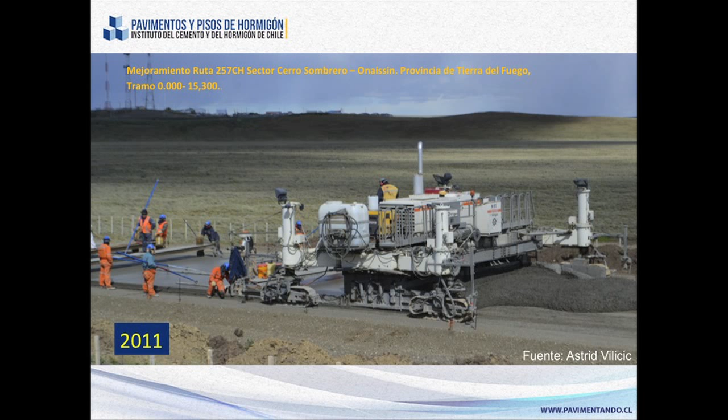For timing purposes, I would like for us to start this presentation with a project that is quite important for me because fortunately I have had the opportunity to see paving works from Mexico to Patagonia. One of the companies that has given me a very good impression regarding their way of working and performance is Vilicic, because in several aspects, they are a role model in terms of work execution. Here we have the author of this paving work, and since it is in Chile, I consider it ours, so I'm very pleased to present it.

I would like to thank them for this because many of the things I can tell you, she keeps me updated with all the information. I would like to highlight some interesting details of this work regarding performance and the works in general.

This was quite an important milestone because it was the first work that combined optimization of thicknesses through optimized geometry, meaning short slabs, with the incorporation of synthetic fiber. Several milestones took place that set the starting point for a new generation of concrete pavement here in Chile. There have been several generations of concrete pavement, but I'm referring to the last historical moment where there have been many modifications in the specifications and in the way of building. Some technologies have been incorporated that seemed impossible some years ago, and some of them even reflect what the entire world is looking at here in Chile.

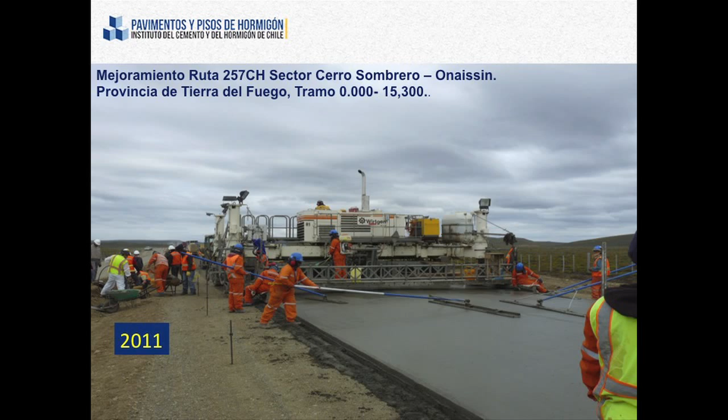Those works had some interesting highlights as well. But now I will let you know about some milestones.

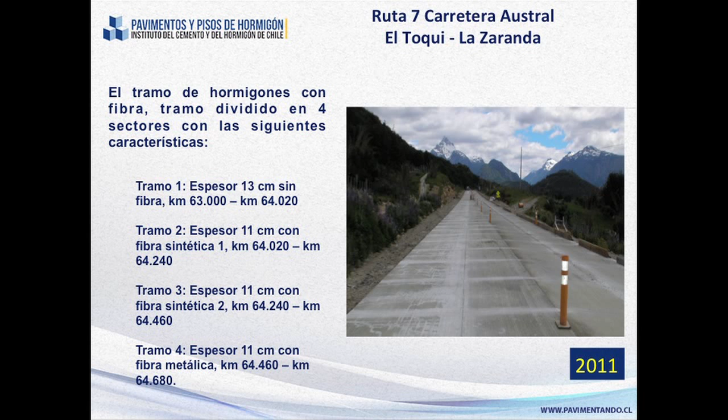For instance, in Route 7 in the region of Aysén, you will find the project El Toqui La Zaranda that was carried out in 2011 under the initiative of Cesar, who was the manager for this section, which was quite interesting in the region of Aysén, where we had the opportunity to check the behavior of different types of fibers and the effect they could have in terms of optimization.

This project, according to the words of Cesar, has currently been in operation for 4.5 years, with optimal performance in general terms. For those of you who know the region, Route 7 is the main road of the region without having very high traffic, and this section, despite being a test section, is a road for definite use.

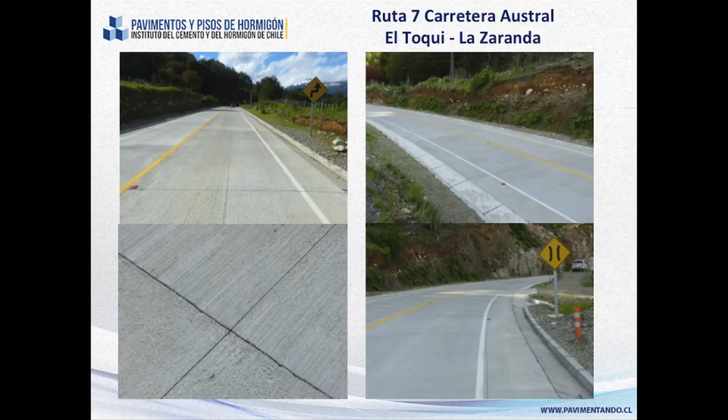Here we gathered a lot of knowledge and information, and this project even has a weather station whose purpose is to enrich entry data for future projects being designed with this methodology. These are some pictures from the last time I visited that section some years ago, and it is in optimal condition.

Another interesting project for us, which was a milestone back then, is the replacement of Route M50 Cauquenes-Chanco. This 15-kilometer project in short slab, in the 7th region, was also a milestone from the point of view of several execution aspects in terms of road works for concrete pavement in Chile.

One of the most important details is that a high percentage of the work was carried out as night pavement, which was practically new for those of us used to those types of works in Chile. It addressed a problem that was substantially dangerous in the execution of this project, given its geographical location, because in that zone in particular, thermal gradients could reach a condition of severe construction curling that could worsen the future performance of the pavement.

So we tried to go to the source of the problem, and we used night pavement to reduce that risk.

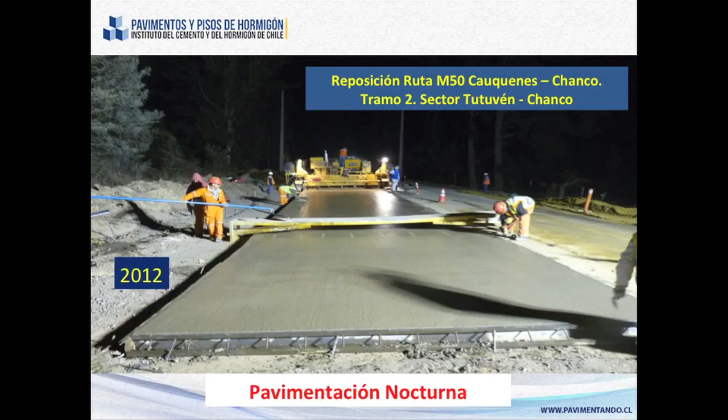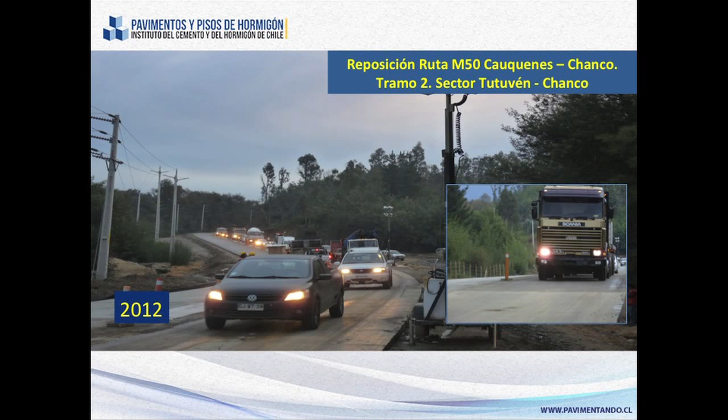Here are some details. I already talked about night pavement. Another important detail to mention has to do with what Robert said regarding the implementation of maturity in Chile to enable the opening to traffic in the projects hired by MOP.

Currently, this is a benefit because one of the aspects where concrete pavement is vulnerable is the feeling that you have to wait a long time until you open it to traffic, with the possibility of not only measuring maturity, but also processes that make concrete more mature and allow opening to traffic.

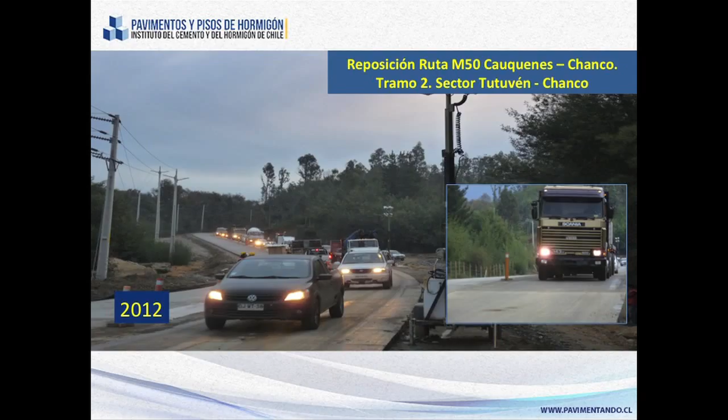The benefit that it implies is what happened in this project, for instance. According to what the supervisor reported, we're talking an average of about 4 or 5 days until the opening to traffic under normal conditions. And I'm talking not only of lightweight traffic, the entire route under normal circumstances. You see that we have those typical Scania trucks already driving through the road after the third or fourth day of executing the works. That is an important milestone in terms of what a contractor needs today, which is to speed up processes.

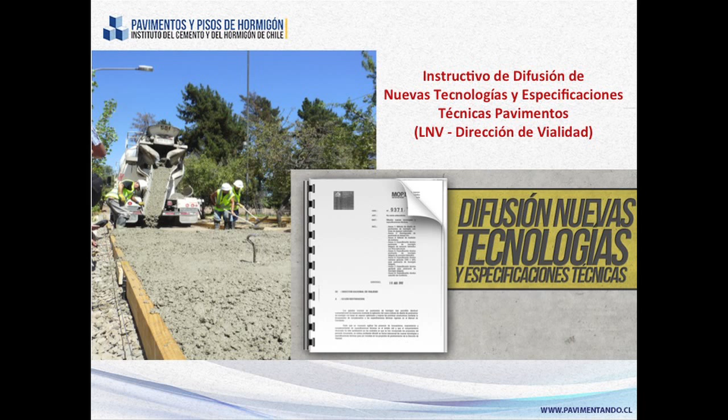This makes this possible, and they also imply a scale economy. All these projects at the beginning were possible thanks to modifications in their specific specifications, and as a bank of information was being built that allowed us to have the tools to do this in the best way possible, comes the instruction on new technologies, on technical specifications for pavement.

This was the work of the road laboratory. I have Marcela here, and we have worked very well together. We have Cesar also. I already named you, so it's important for you to keep this in mind.

These guidelines, despite the fact that it is a document that was published in 2012, we have looked at all the mechanisms to distribute it. I always run into the fact that there are people that do not know about its existence, but it is very important because some of the technologies still are not part of the road manual.

This document enables them to be used in Chile. Thanks to this documentation, and we will have to update it at some point to the new experiences that we have had over time after 2012, it is a document that you can access through us through pavimentando.cl, where you can download this document, or by contacting us, and obviously with the National Road Laboratory. It's important for you to read this document because it enables many of the technologies that can be used currently.

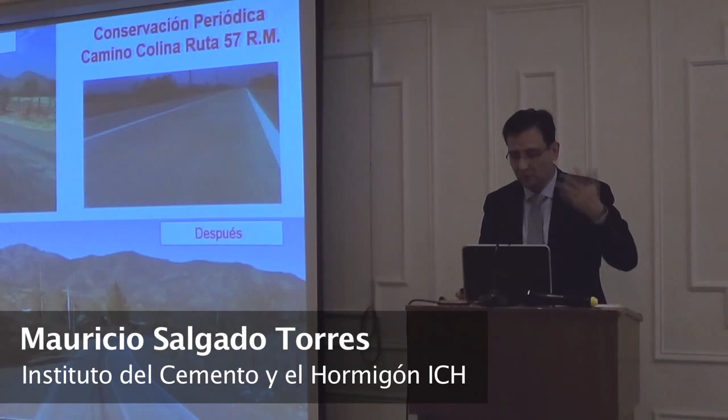And this is how we looked at the possibility of incorporating a short slab concrete in this access. You can actually visit it, and we inspected several times because this is the closest one that we have to Santiago in terms of short slabs.

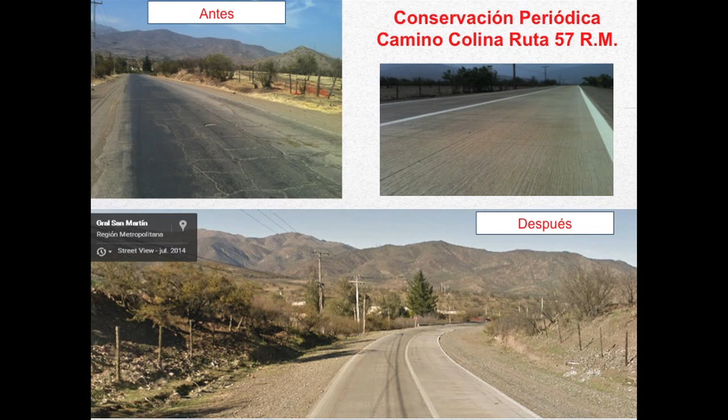Once again, these are images of Google Maps Street View to show you a representative picture of that pavement, how it used to be in 2012, when we visited for the first time and we made the decision to intervene it, and how it looks now in July 2014, according to Google.

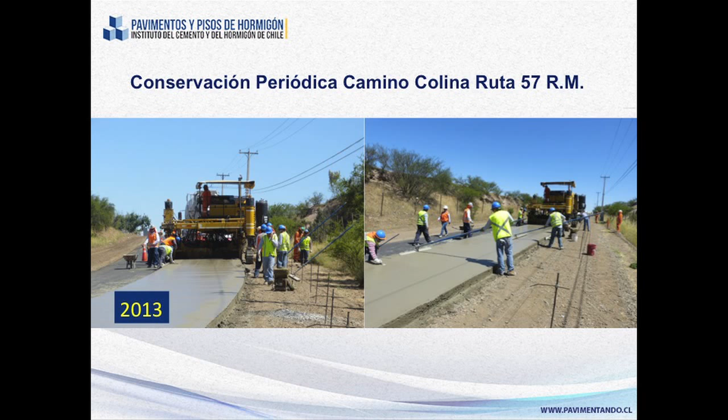In the summer of 2013, we did the execution of the construction. Here are some pictures of January 2013. And here, the pictures that Google took were during the construction process, which was in November 2012, where we started the works, and it ended in January. In April 2013, it was already in service.

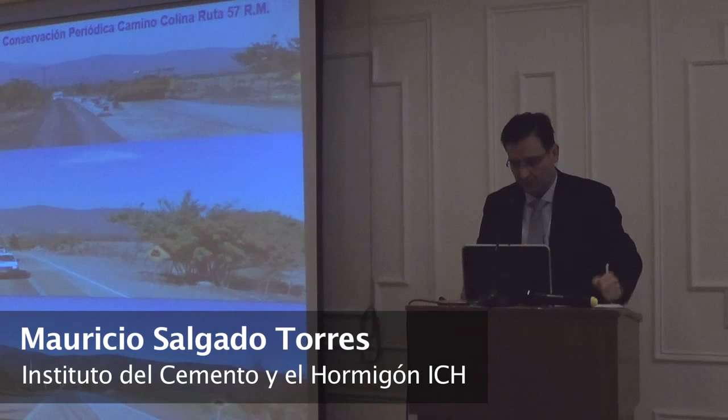Afterwards, there have been several updates where you can see the current conditions of that pavement. Some contracts have been signed: 15 kilometers, one 28 kilometers, and the other in Chiloé.

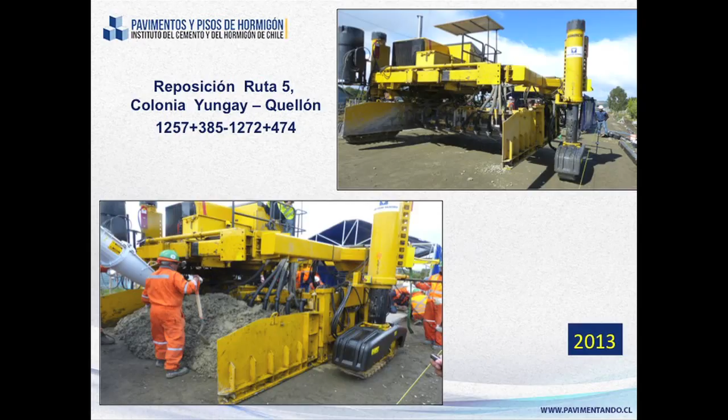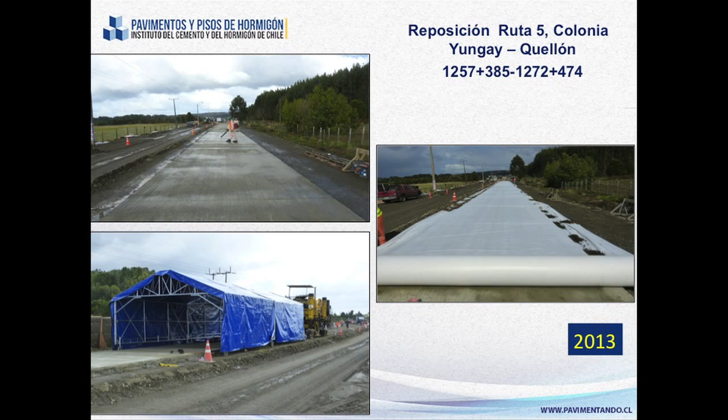These are pictures of Route 5 of the section Colonia Yungay Quellón that is already finished, and these are pictures of the execution phase where some incorporations of aspects were done in terms of the wet layer to help the curing and maturity process for the concrete blanket to open to traffic quickly, or some other measures due to the weather of Chiloé that is very changing.

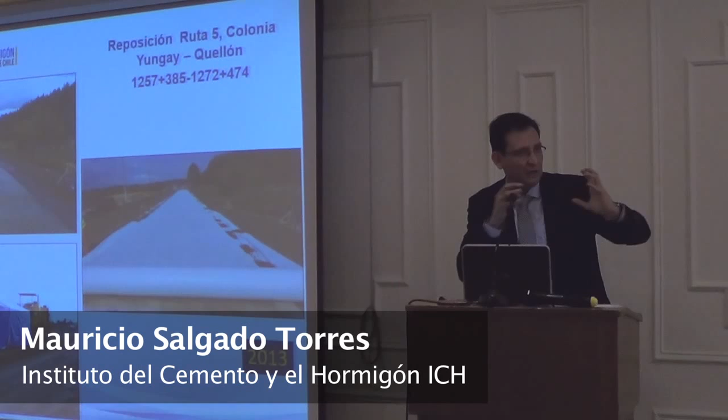Sometimes I have a sunny day with very good conditions for paving, and then in 15 minutes I have heavy rain. So we had to make some preventions in terms of rain and wind, which are very characteristic of Chiloé. The tenting section is longer, but here in the picture I'm showing you the first part of it.

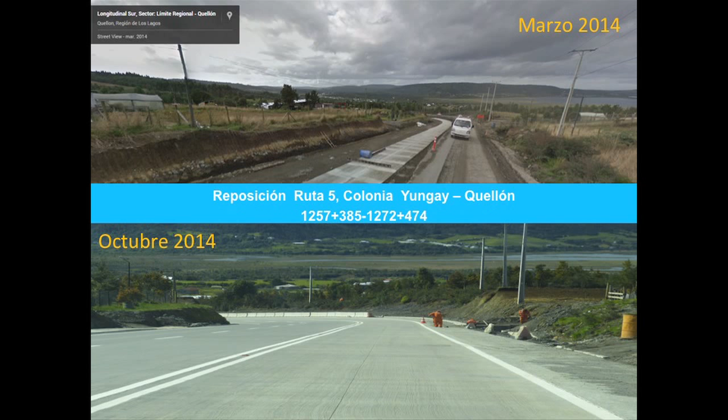This picture shows a very interesting detail. Up to the transversal section of the Colonia Yungay section, obviously it is an asphalt pavement. You can realize which was the section and the plotting that it had. And this is my picture, almost the same place, and you can notice the difference in it.

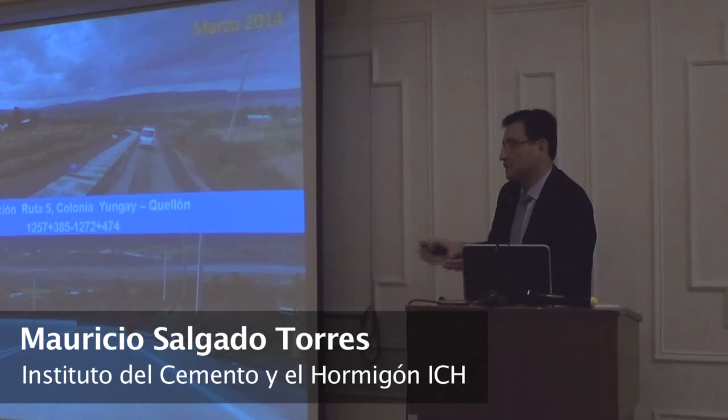I'm showing you this because with these kinds of pavements, it's not just an opportunity for improvement, but it also gives you economy of resources, where with the same amount of money you get a better section and an improvement of the road. This is what we achieved by incorporating optimized pavements as a general project. With other conditions and structures, it would have been impossible to reach that level of improvement. We now have interesting cross sections on the island that didn't exist before, and they reduce travel distances from Puerto Montt to Quellón. I could tell you many stories of how long it used to take me to get to Quellón compared to now, with the route practically finished.

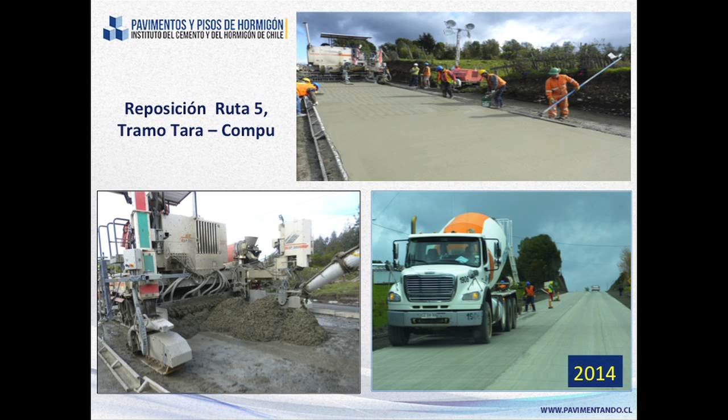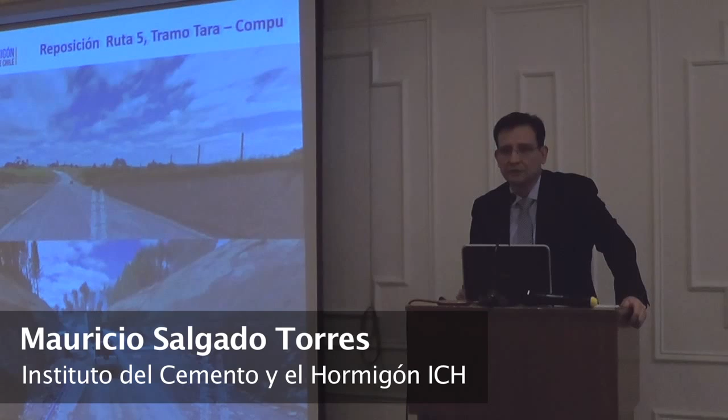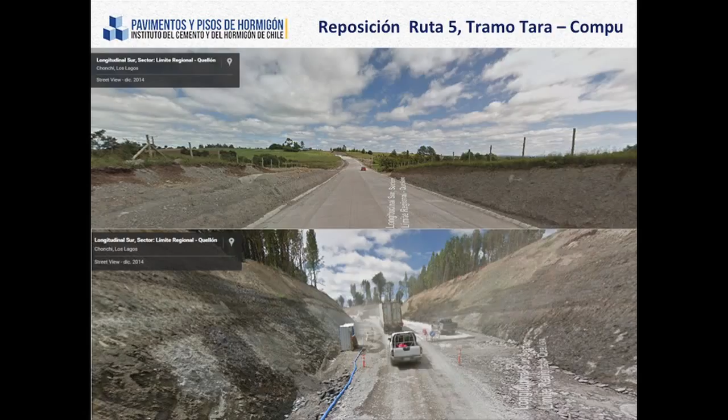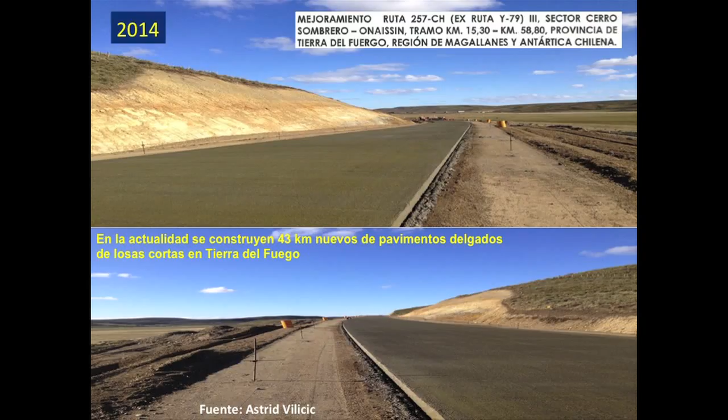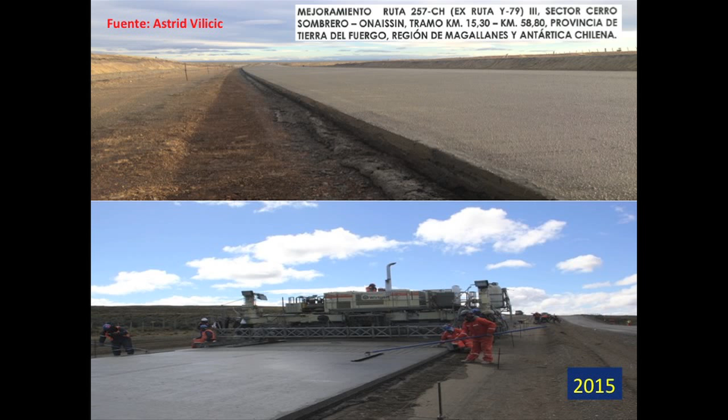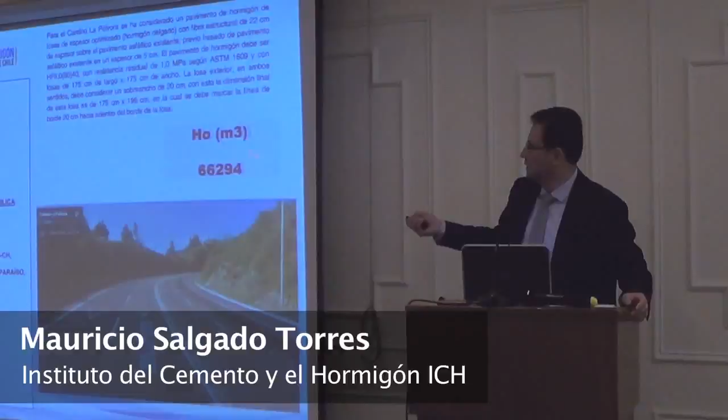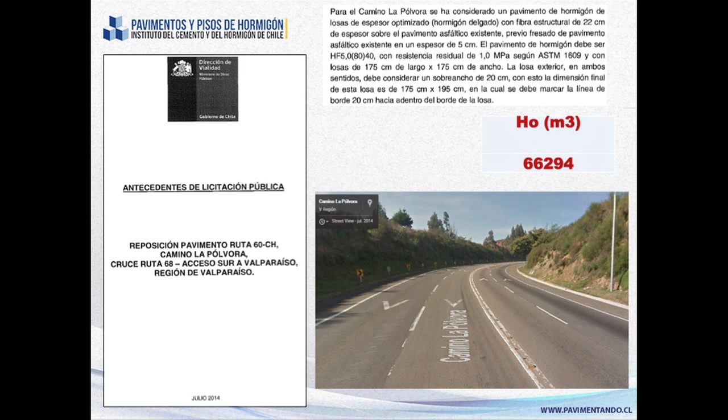This is a project that's about to begin. Here I'm accompanied by the person who will execute it, and I hope to have a lot of images for our coming presentations. He will be in charge of the La Pólvora project, which is fantastic because it's a great challenge in terms of geometry. We haven't done this before, but we know he'll be able to do it. We'll create an important structure with short slabs, located over the old asphalt pavement, so this will be a non-adhered overlay. To give you a sense of the order of magnitude involved, sometimes the kilometers can be misleading. It's about 15 kilometers long, similar to Yungay, but that's just a simple section. This is a double pavement, so we're talking about 66,000 cubic meters of concrete to be placed — an interesting figure. It will begin in the second semester of this year.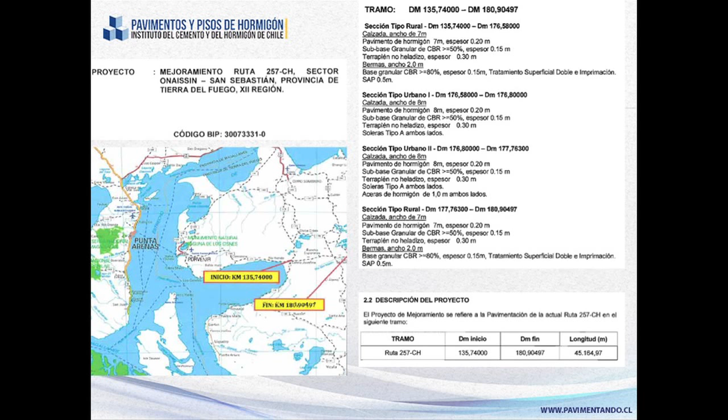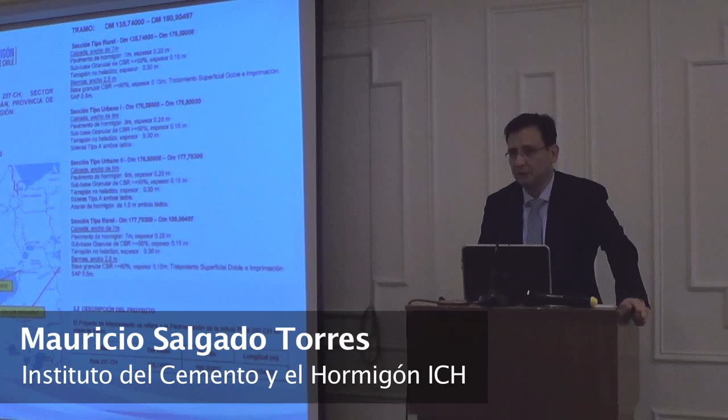There's another project underway that's just been awarded: the section of Highway 257. We're talking about 45 kilometers in length that will start construction in the coming months. There's also a project in the tendering phase, the Castro bypass, involving around 22,899 cubic meters of concrete, valued at 25 million pesos. This is also a short slabs project, changing the focus and moving from projects for high-transit short slabs.

There is a second possibility derived from the short slabs we've been pushing recently, which will be interesting not just for Chile but for other Latin American countries: what we call ultra-thin pavements of fiber concrete. This is for low transit roads, unlike the Pólvora route and others with significant traffic. We're talking about an application that until recently seemed impossible for low transit roads — people familiar with this would say concrete is impossible to use here. But due to technological changes in recent years, we can reduce costs and make it possible to implement these solutions at the level of basic or intermediate basic roads. This gives us a cost-effective, competitive alternative with a more prolonged life cycle, which makes it highly attractive. We're thinking about how to bring this solution closer, which we know has already been implemented and put up for bidding by the ministry.

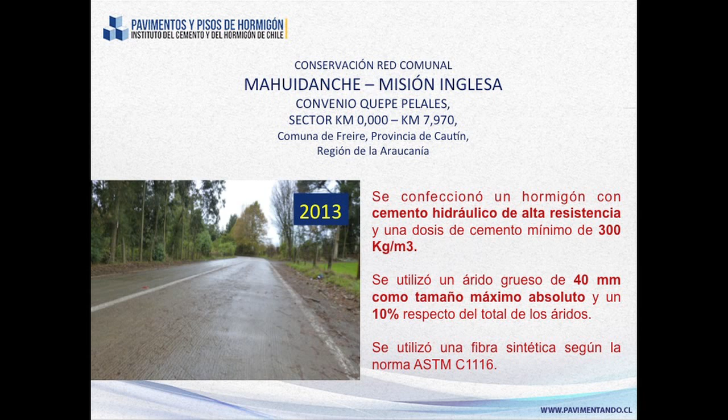So these are projects that have a certain profile, where we could at least open up possibilities and implement solutions of this type. What's most outstanding in terms of time in service is Mahuidanche and Misión Inglesa in the 9th region, which ended in 2012. It's been in service for more than 3 years.

These are photos that I took every time I go to Temuco. I go to Mahuidanche and take these pictures, which basically show what we have as a structure. I took these pictures 2 weeks ago when I went to a seminar in Temuco and visited the section, and obviously it's impeccable.

Thinking that these are concrete structures with 8 centimeters, 9 centimeters in the center and 11 at the edges, supported over the platform that existed before. There was no incorporation of any base, but we took advantage of the good support capacity that the existing pavement had for a road that was already being used for vehicular traffic for a long time. If it hadn't been intervened with this ultra thin pavement, probably a double treatment solution would have been incorporated, which does need a base and the double treatment to have a competent structure.

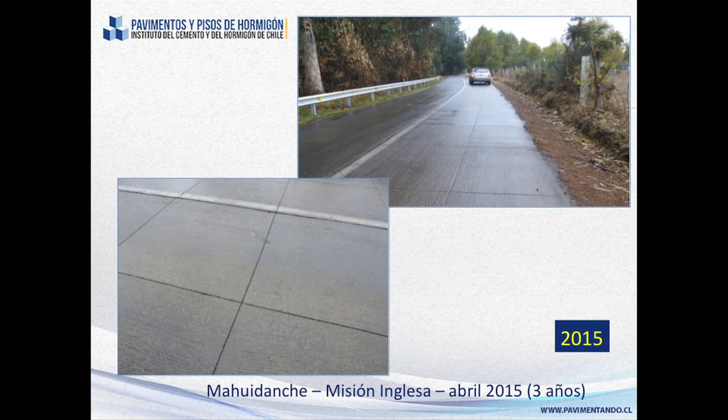In this case, what's interesting is that this solution is already 3 years in service and it will be lasting for a few more years. It depends on the location, the climate conditions, traffic, and in some cases it could have very extended durations. I've seen some that have lasted many years, and I've also seen double treatments that in more critical situations, probably in 6, 8 months or 1 year, need to be renovated.

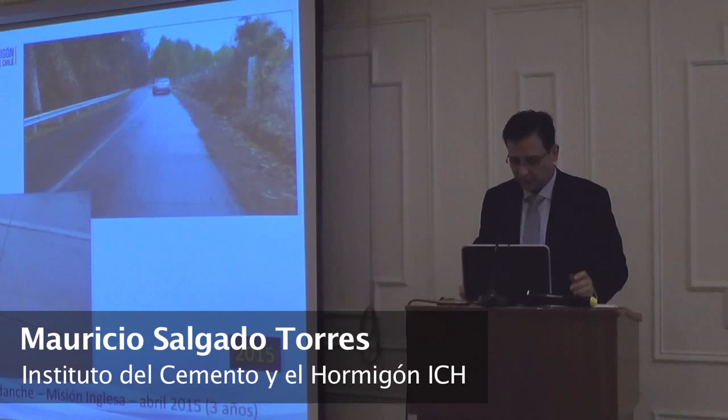And this is precisely where this alternative becomes interesting, because if the two are comparable in cost and one can give me a longer term solution, that's where this solution would fit perfectly. I'm not saying it will fit all projects, but we do have a new window open with different possibilities for new pavements in the country.

Another section relatively close by is this initiative that we achieved thanks to the regional government, the Highway Administration of Valparaiso. I'd like to point out that here's a person from the regional administration who can tell us more, and I want to thank them because they gave us all the facilities to construct this section with characteristics very similar to what we've been discussing today, so that we could apply the ultra thin pavement and so that they could see that it's possible.

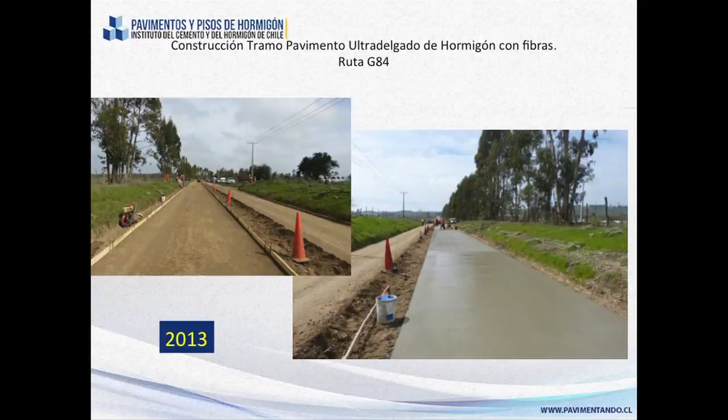They were talking about the section with low transit and didn't believe us too much, but since they've seen the pavements already in service, they've changed their perspective.

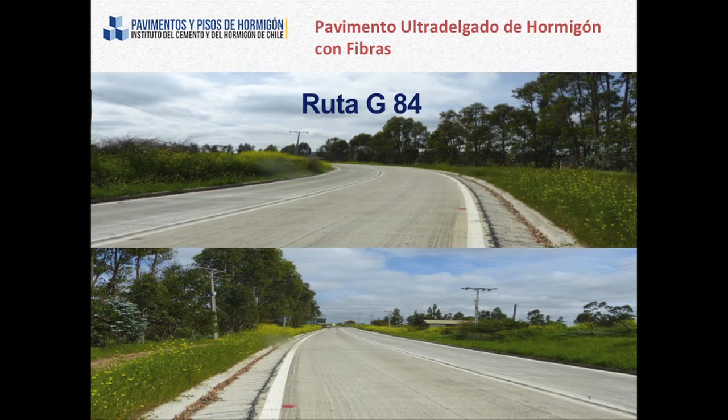In October 2014, this was how it looked, quite good. Other photos. In fact, I always comment how content the roadway would have been because the sun came out and the flowers came out.

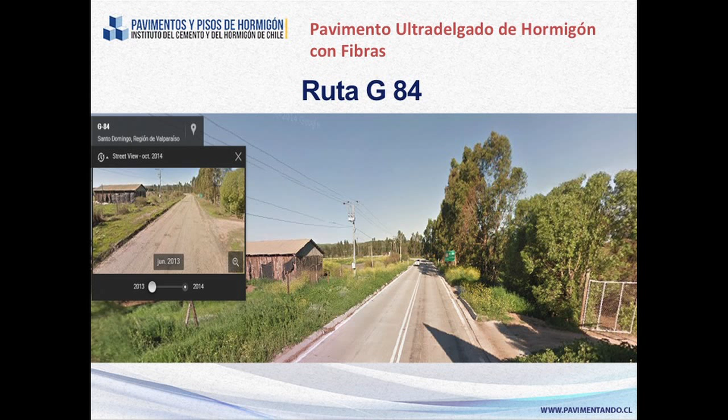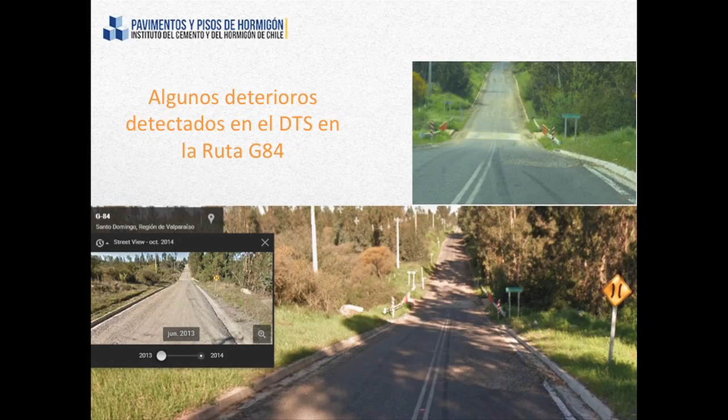For those who don't believe me that I take pictures in special situations, I also invite them to visit Google Maps and look at how the pavement looked before. It's an alternative you can see. That's what the transversal section looked like with gravel, and now with concrete. Here's another view, with the short, ultra thin slabs, and also the nearby slabs.

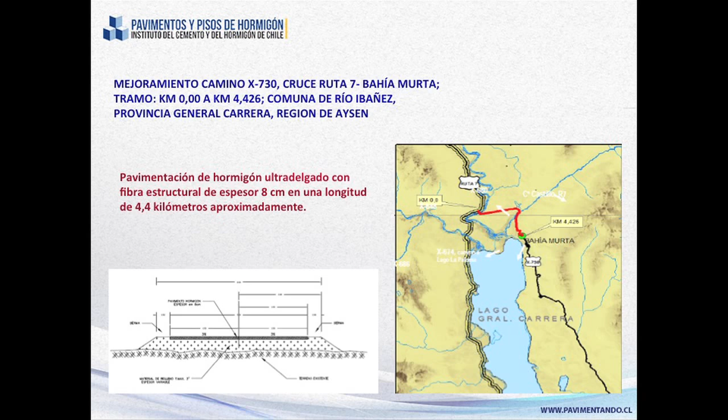Now we'll wait for some details on the dosages. It would be very interesting. This is Bahía Murta, a longer section of 4 kilometers, and at one point we will show you what's happening with this project.

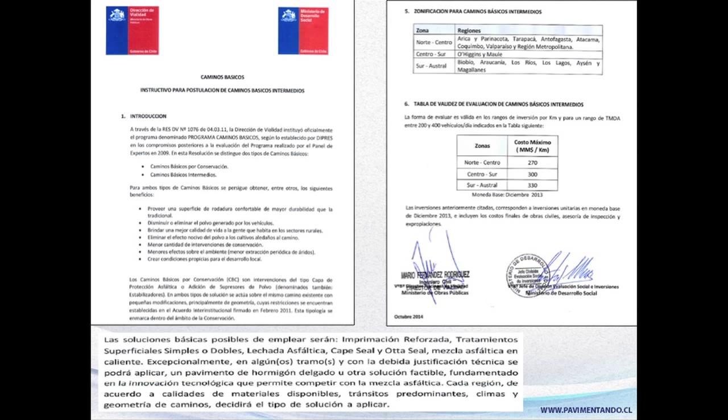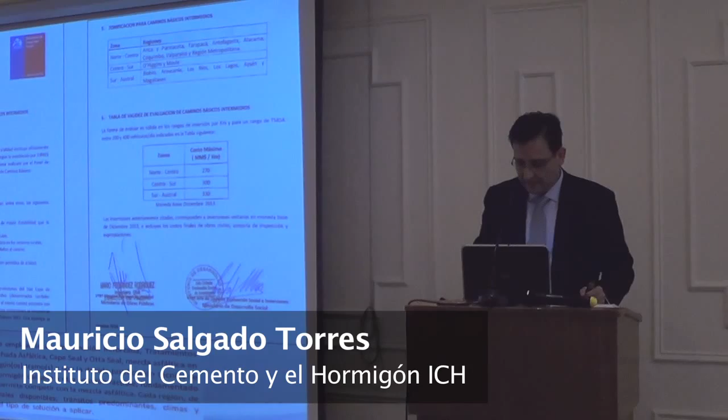Meantime, there have been some interesting administrative developments. These are the instructions for submitting a tender for basic intermediate roads. This was done last year in 2014, and in it they incorporated the possibility, in the instructions, that thin concretes could be considered as an alternative. Even if it seems quite subtle, it makes a big difference, because it practically gives huge backing to the solution, that it can technically be used, today by the Ministry of Social Development and of Public Works. So this can be decisive for us.

And based on the success of the incorporation of this technology, the Ministry of Public Works also became interested, making it possible for them to receive preliminary designs when they're surveying the initiatives.

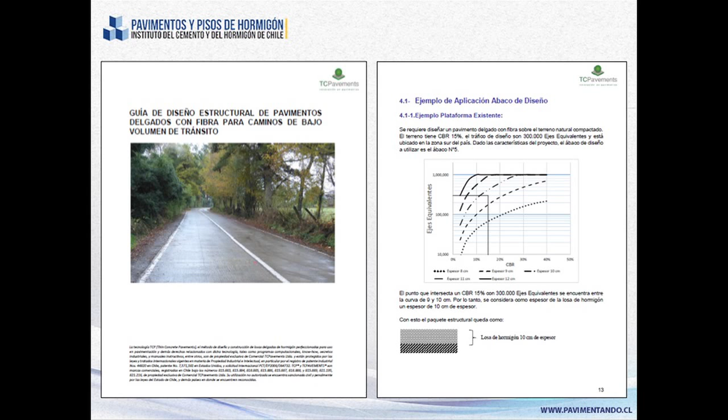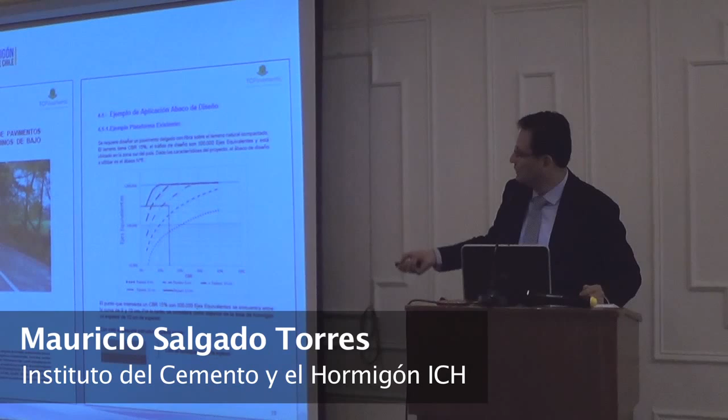This is a work that's in the development of a guide for structural design of thin concrete for low transit roads. This alternative allows us to quickly design, with very simple inputs, what the characteristics of the pavement needed would be for a low transit project.

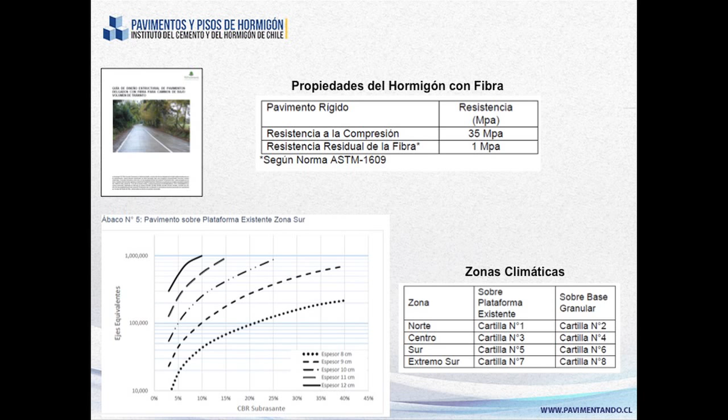The guide is very simple. It's got different graphs, and it talks about the existing terrain characteristics, and whether a new base would have to be put in. And here we use OptiPave.

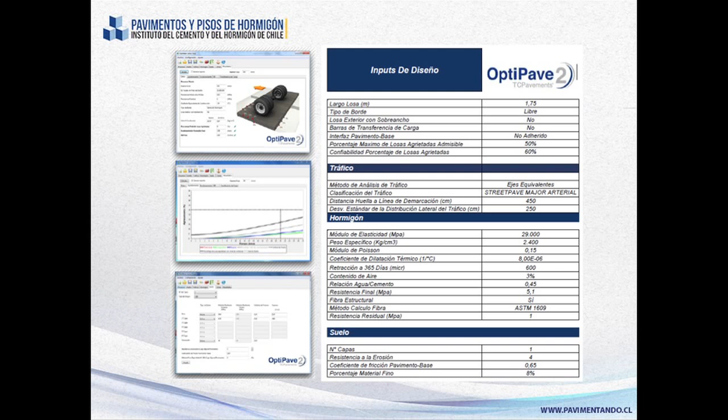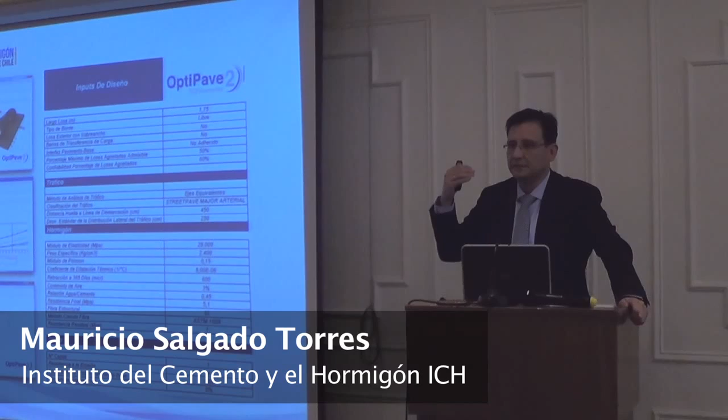We have been working hard on training in Santiago and the regions to bring OptiPave to more people. We've had several workshops in Santiago and in the regions, a seminar in Temuco, and one in June in Concepcion. We will reach the cities that request this from us. Today, many regions are interested in having the institution conduct a workshop at their venues.

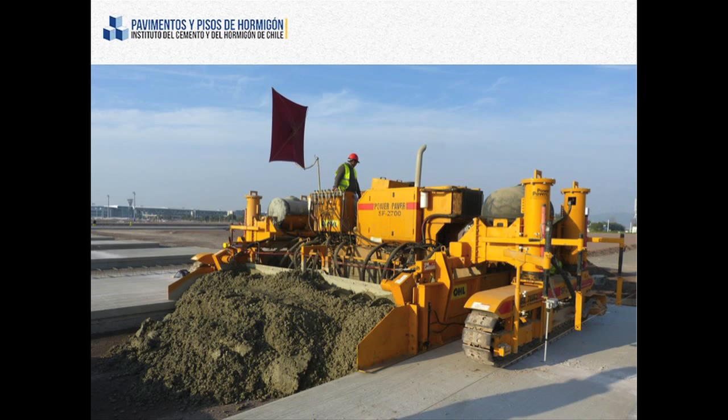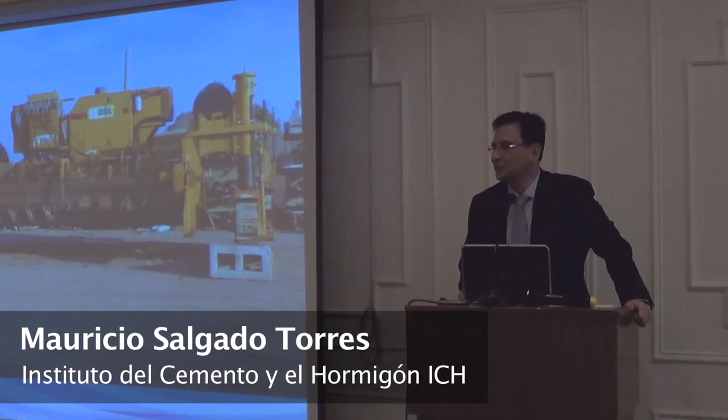I'd like to point out that it's not just in recent works that large projects have been done; significant works have also taken place in other areas. For example, the recent completion of the apron at Arturo Merino Benitez Airport. This was done by OHL, as part of the works for extending the airport apron. It's already finished, and the paving is ready.

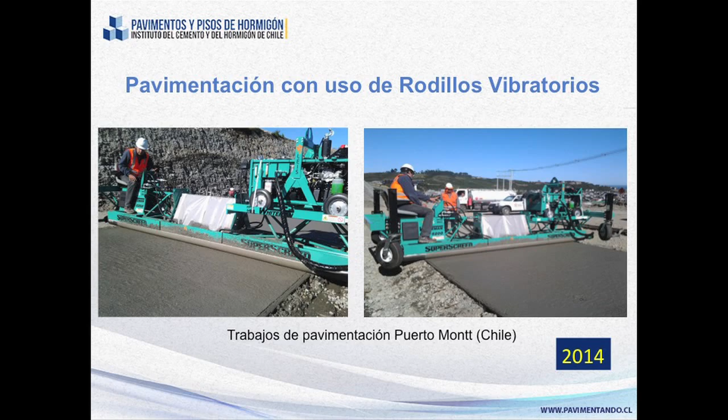We just need to know about the projects, we have several paving trains ready. And also, equipment has arrived in Chile for reinforcing other types of pavement.

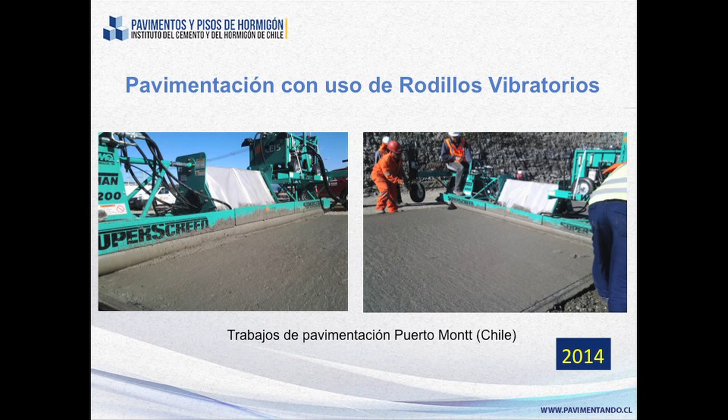For example, this in the 10th region is already underway — urban pavements or industrial pavements. Here, Carlos Curoto is here; he was driving the equipment. I put him in the picture so it would appear that it wasn't international, but in Puerto Montt.

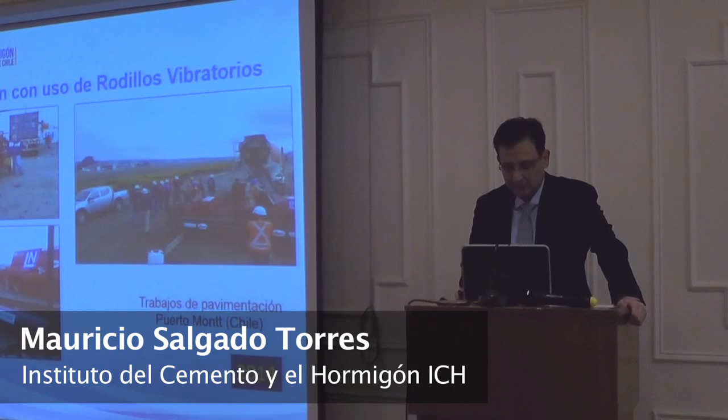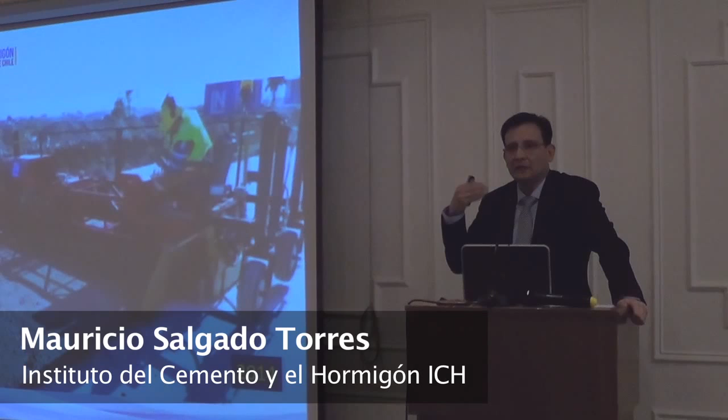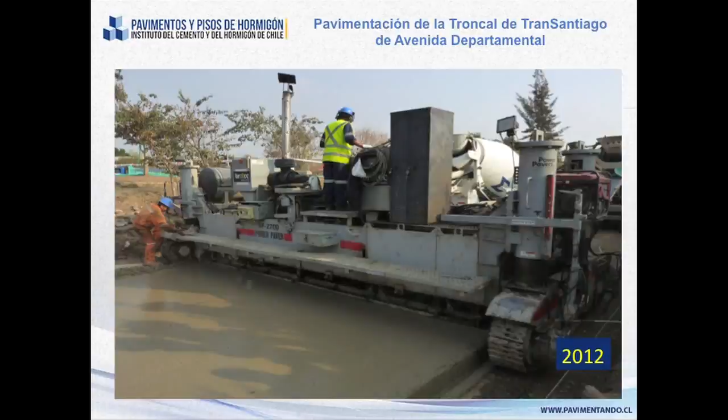We also have another friend working on this other project, in Puerto Montt, by the Public Works Service. This has also had to do with many other projects that were carried out manually, and so new technology has begun to be used. There are many more projects in concrete than 5 years ago.

This photo is a little older. It's just to mention that there are quite a lot of fleets of pavers that are anxious for us to use them in different works.

Finally, I'd like to mention another type of activity we've also been working on and wish to continue developing: this research work that we're carrying out together with the municipality of Providencia. We're being supported by the highway administration, and we've made an attempt to explore the possibility and technical viability of incorporating the new generation of surface textures in urban pavements, generating attributes that can benefit this type of roadway.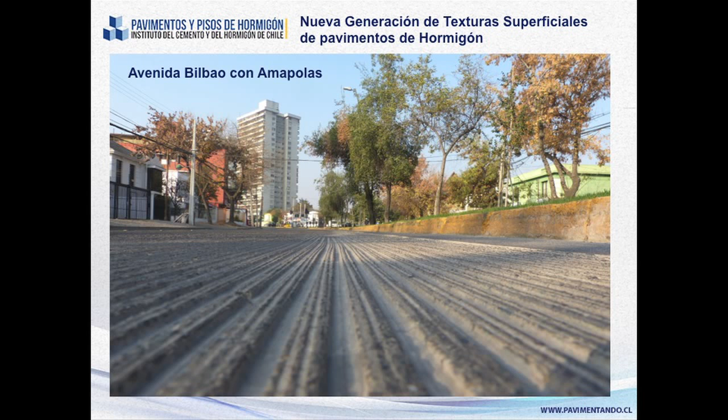We're improving, and I'd like to invite you to visit Bilbao, the pavement facing west, where you cross Tobalaba and head west. You will notice this pavement that's been recently intervened on, already using what's called the new generation of surface textures, incorporating brushing and grooving in concrete pavements.

There are many more things we will be telling you about in the near future, so for those interested in all of this, we can continue the conversation. With Francisco, we've already been talking, because there are opportunities for all of this.

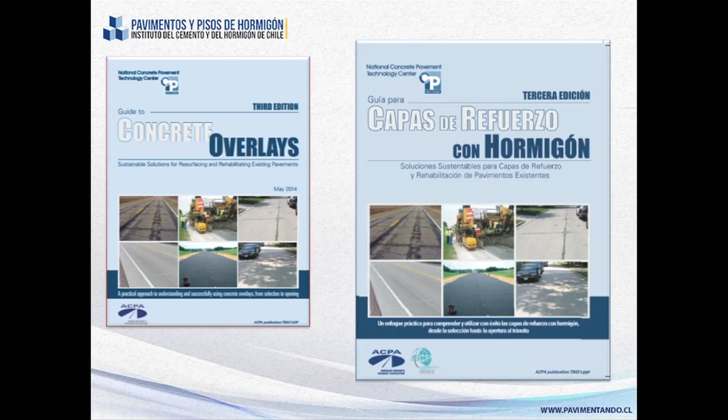All that's left is for me to hand the floor to Roberto Alvarez, who has been collaborating with us on the translation of the book, Guide to Concrete Overlays — in Spanish, translated as Guía para capas de refuerzo con hormigón. An anecdote: our aspiration in producing this book, when we accepted the challenge, was to create a book that would transcend Latin America. We wanted a neutral translation that would be understandable, mainly for Chileans, but also transversal across Latin America.

The first obstacle we met was the terminology associated with what we know as recapado, or overlay. The title the book should have had in Chile would probably be Guide for Recapados with Concrete as the text. But that word is controversial in some countries, so we wanted a universal term that would not generate confusion. So we've called it reinforcement layers with concrete. I'd like to invite Roberto, who will tell you some anecdotes about the book.

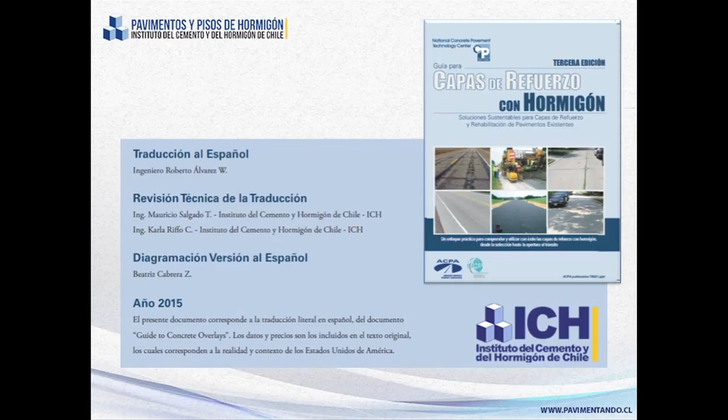So I called in Roberto for this, and he accepted the challenge. And to me, whatever came after was quite special, because we created a work team with Roberto and Karla Riffo, and the three of us spent entire afternoons for a long time checking paragraph by paragraph and phrase by phrase the best way to say it in Spanish. Roberto had done some impeccable writing work. I was surprised by how easy it was for him to translate such a complex text, and to me this was an impressive learning experience. It was very fun to do this.

We acquired a lot of knowledge. I said with Karla that many times you believe that you know so much, but then you realize that you learn every day. I would like to mention what this team has done. And also, I would like to mention Robert, who took the time to review it, to add his notes, as he has done before. He has been our international reviewer for the document, and I would like to thank Robert for spending his own time helping us for this. And for all of them, I would like to ask you for an applause.